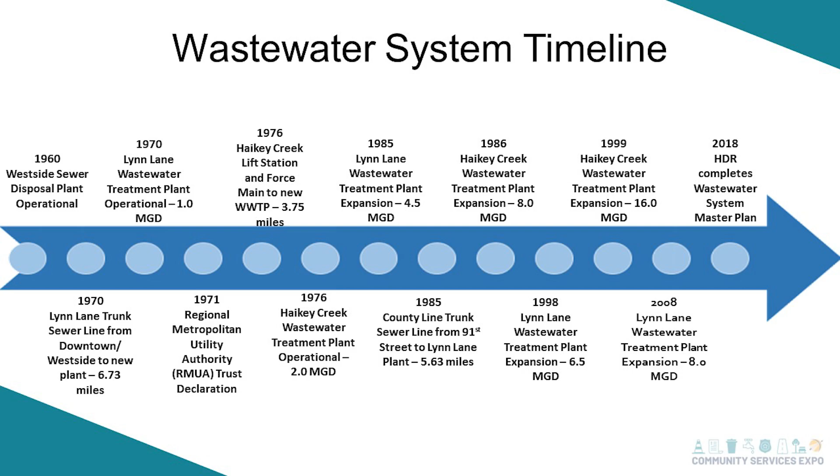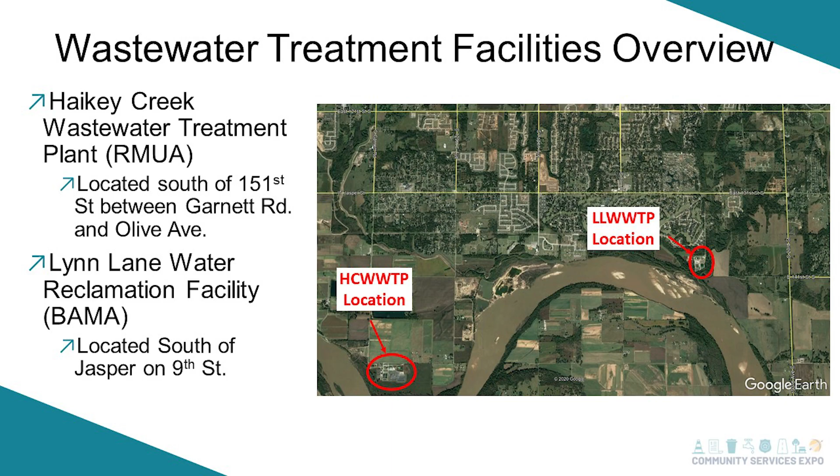So for our facilities overview, you can see the locations of our Haikey Creek plant, which we share with Tulsa, and then our Lynn Lane plant, which is owned by the City of Broken Arrow. And with the RMUA, we're partnered with not only the City of Tulsa, but the City of Bixby has rights, and the City of Owasso has rights. So we have quarterly meetings with RMUA that we all have a say-so in what happens with the plant.

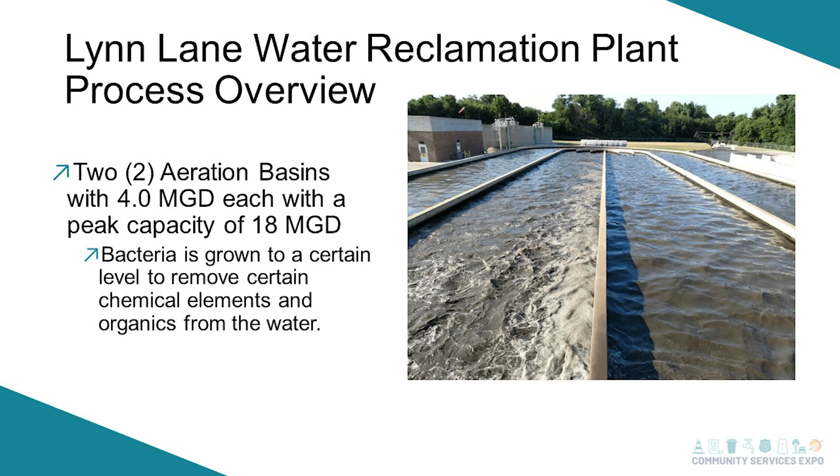I want to go over a little bit of our process at the water reclamation plant. It's a water reclamation plant because we are not wasting water, as our plant managers would say. So there are 2 aeration basins that we have at the plant. They each treat about 4 million gallons a day. And so with that, we grow bacteria within our basins, and it helps alleviate the chemical need. It helps also with the odors and the organics in the water.

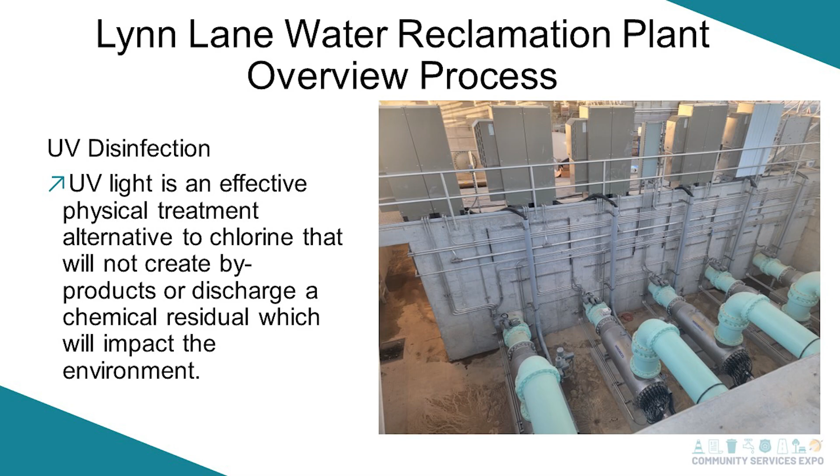And so this is a picture of our UV disinfection basin. It's currently in process of going online. So we used to feed chlorine in our system, which can create byproducts and all that when we discharge. So we're trying to take a better approach, and so we've been implementing this. We've had a few little hiccups getting it online, but it is currently installed and working. I'd say we've had it online maybe a couple of months now. So it's doing great. We don't have to feed chlorine anymore, which is a better disinfection overall for the environment.

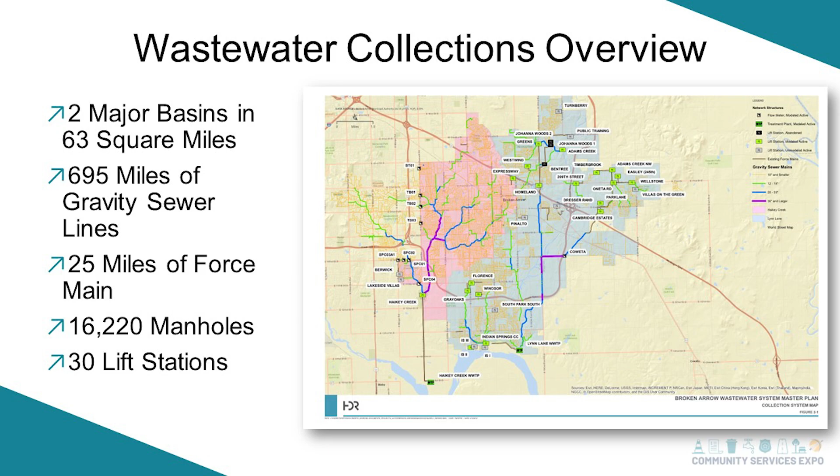So there are 16,000 plus manholes in our system that our crews take care of. You know, we could have I&I problems, which is inflow and infiltration. So we try to seal those up so our wastewater plant doesn't have to treat more than they need to. We have around 30 lift stations.

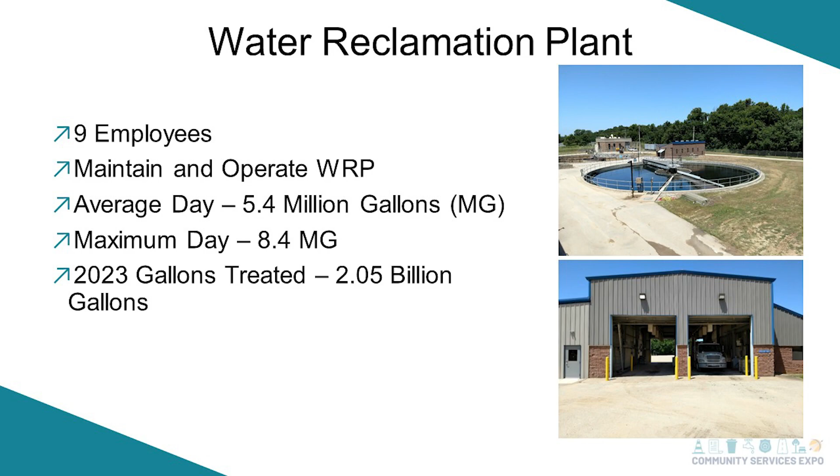And you can see, so I'll just point out in the picture, this is one of our clarifiers that we just rehabbed. And we're currently rehabbing this building, which is our belt filter press station, which is where we press all our sludge and haul to a landfill. Sludge, you mean like poop? At that point, it's not necessarily poop, but yeah. It's all the crap that you want to get out of the water. Yes, so it's all your solids that's settled.

You know, at the belt filter press, you press out all the water, so then it's just the solids that we take to the landfill, so that when we release it back into a stream, after the UV disinfection, you don't have any kind of solids. You can't, per DEQ standards. And the solids are in a landfill? It has to be a permitted landfill that we take it to.

So a lot of the time we haul our solids, I think, to Southside in Tulsa, the city of Tulsa, and they dry them out. They have drying beds. And then they have to be tested for E. coli, that type of thing, before they can be taken anywhere else. And I'm not sure what Tulsa does with them.

Well, you said you grow bacteria. So that's good bacteria? Yes. Okay, because these are like bad bacteria. Yes, yes. So the good bacteria is at the beginning process. It helps eat away the odors, the gases, anything like that. And then they usually kind of stay in your aeration basins because they need that air that we pump and produce in that aeration basin.

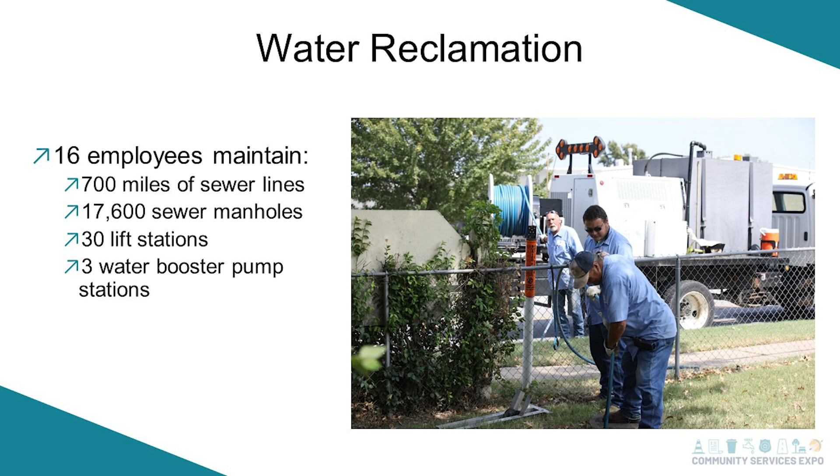So there's all that, and then there's a little over 17,000 manholes within our system. They also maintain our booster pump stations, which are for water. I know they're sewer, but that's part of it because they're dealing with pumps. They're dealing with the pressures. So those guys also will do the 3 booster pump stations that we have in the system.

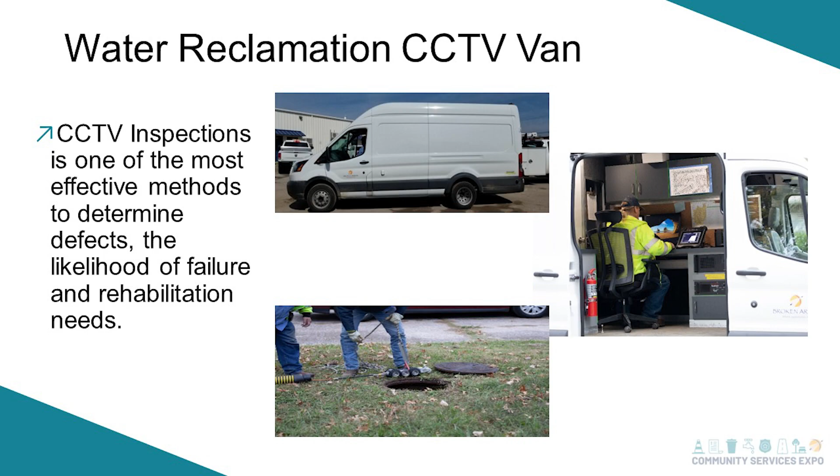So with our water reclamation, our sewer department, we have a CCTV van. This can be used if we have a homeowner that calls and has some kind of blockage. We can determine if it's on their side or our side, because legally we're not allowed to touch the private side. But we can go out and investigate and see what's wrong, or we have some improvements coming in the area, or there are roots in the system. So we're able to use the CCTV van to look for any kind of failures we might have in the system.

Fatbergs? Huh? The fatbergs? Have you heard of the fatbergs? We've not had one of those, have we? No.

Okay. So yeah, you'll see it driving around town. We also have to make sure, when we have a new lift station, that we can get this truck in and out. So that's why sometimes the area is bigger than what you would think is needed for a lift station, because you got to think of the equipment we need to get out there.

Do they get a lot of those quote unquote flushable wipes in the system? Absolutely. Why do they let them say they're flushable? That should be totally taken off the product. I 100% agree, because that's one of our main issues through the system. We have screens at our lift stations. Some they clean out weekly. Certain lift stations they have to do daily, and it's those flushable wipes that we're constantly cleaning out.

But with this truck, we can also hydro-excavate, so like potholing big transmission lines that you don't want to dig down to. This is a safer option. A lot of times we'll contract that out just because we're so busy with this one truck on our 30 lift stations.

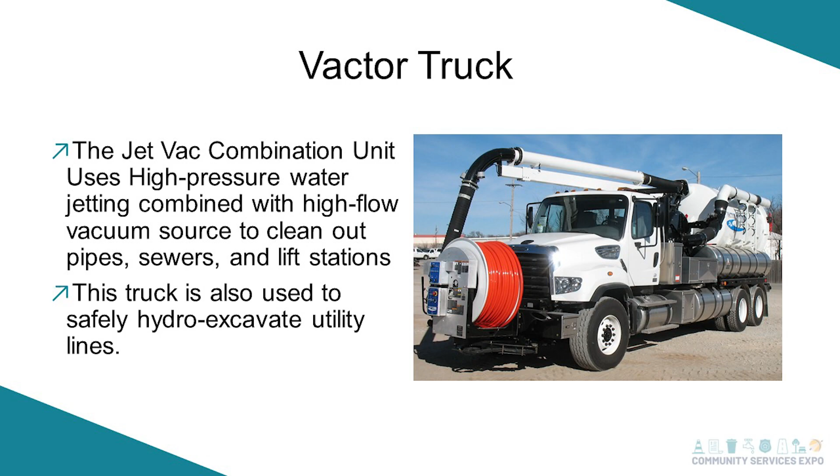Is there a lot of grease in the lines? Yes. So people pour their grease in the line? Yes. At our table too, we have the water quality girls, and that is their wheelhouse. They started a FOG program, which is fats, oils, and grease. And so they are going around to restaurants and making sure their grease traps are to code, to help with our system, because it causes blockages and hurts our pumps at the lift stations, and can cause overflows. There's a lot that we can do. It's just like your arteries in your heart. Yep. Exactly. Yes, sir.